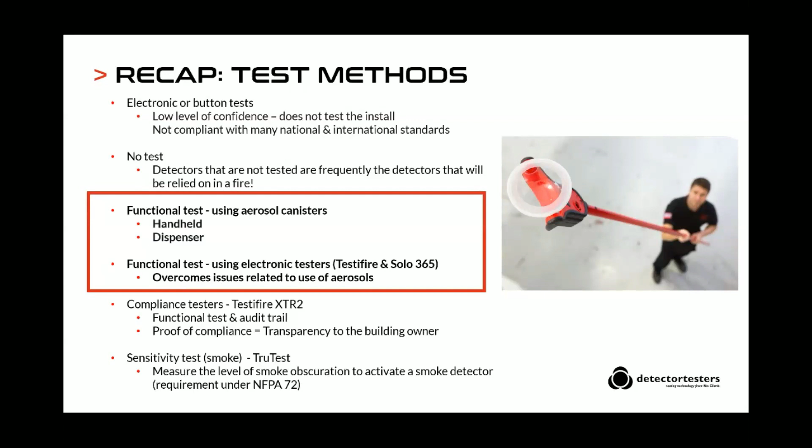So I just wanted to recap on that, just for ease. What I've done here is gone back to British standards, since a lot of national and international standards derive from British standards. I wanted to take a few little clauses here.

First, what actually is a functional test - British Standards clause 45.4 defines it quite nicely. It says tests should enable elements of combustion to travel unhindered from the protected room into the chamber and cause an activation. That's absolutely key. The functional test is currently looked upon around the world as the best way to get the highest level of confidence, whether testing smoke detectors, heat, or carbon monoxide, or any combination - proving the fire phenomenon can travel into the chamber and cause an activation.

It's also in the British standards, in slightly different words - 45.4 note 13. As we were just saying, the use of a test magnet or test button just doesn't satisfy the requirements for commercial fire detectors. British standards make it really clear that this is not compliant at all.

One other thing we'll touch upon briefly - technology is moving on in all sorts of areas, including detection. We're seeing more multi-sensors coming to the market now - fire detectors that usually employ a smoke sensor and a heat sensor, but sometimes also a carbon monoxide sensor, or any combination of those. 45.4J talks about the testing of multi-sensors.

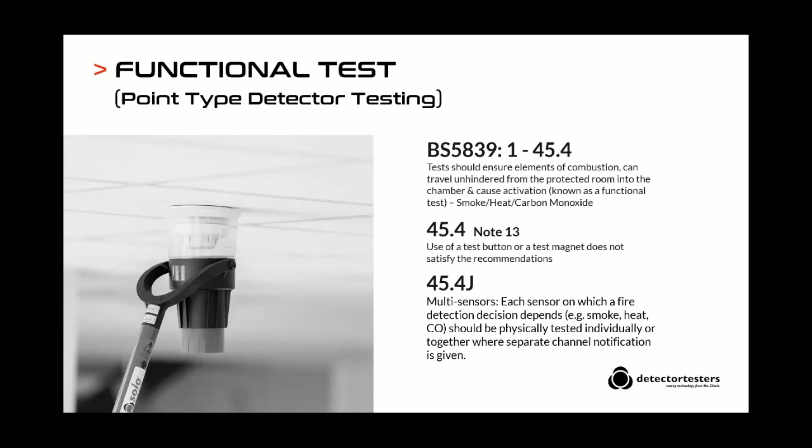But one thing to be aware of when testing multi-sensors - if you test them individually like that, it may be compliant, but it will take a lot longer to test, because the whole point of a multi-sensor is to push back against false alarms. That's why they're becoming popular and being installed. This means a multi-sensor that only sees smoke will take longer to go off, but if it sees smoke and heat, it will go off faster. That has implications when doing your test and maintenance as well.

So let's have a look at functional tests in a bit more detail, and in particular, let's start off by looking at smoke evaporation. So what we're talking about here is the evaporation of test smoke, and it doesn't matter if you're using an electronic tester or an aerosol canister to generate that smoke. There is an optimum temperature range here.

I know a number of you will have to work with this particular range. The optimum range for testing smoke detectors is between 15 and 25 degrees. That's not to say you can't test them outside of that range, but you've got to be aware of what the limitations actually are. The reason for this is that the test smoke is designed to evaporate in that particular range.

What happens is that as the temperature drops and goes below 15 degrees C, you will get slower test smoke evaporation - it takes longer to evaporate. This has implications which can basically end up wasting time, because any lingering smoke around a detector can cause a reactivation of the detector.

And in particular, this is an issue for conventional detectors. Now, again, I think we touched upon this in the last session, where we talked about the difference between conventional and addressable detectors. Many addressable detectors have the ability to automatically reset, so when the engineer carries out a test, the sensor is actually reset. But with a conventional detector, in most situations, you have to go back to the panel.

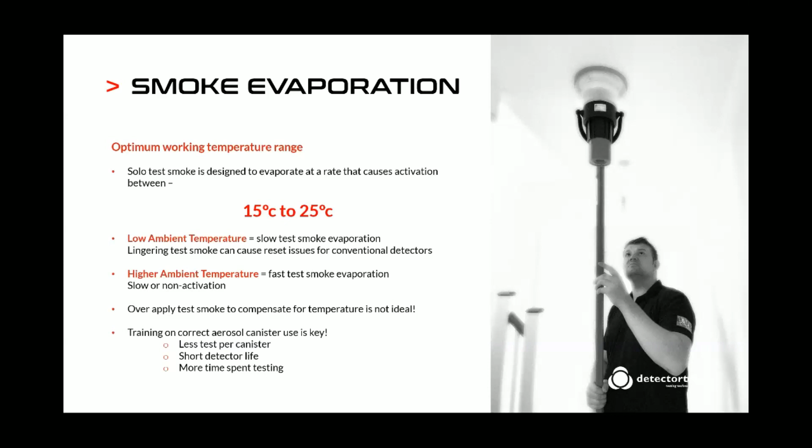It means the chance of misusing it goes up, and there are a number of factors that relate to that. In the worst case scenario, if the engineer using the product isn't using a dispenser, and instead uses one of our aerosols designed for use in the dispenser by hand, that can shorten the detector life and lead to more time being spent at the detector.

We spoke a little bit about a phenomenon called nuisance re-alarms, and we need to dig deeper to make sure we fully understand what a nuisance re-alarm is. This is where the fire detection system has been disabled from connection to the alarm receiving center, and the engineer's on site carrying out tests. One problem that can occur is the reactivation of a smoke detector after a test, due to lingering test smoke. This leads to more time on site and a delay because of the delayed detector reset time.

What we've learned from the market is that this can be a significant issue when testing conventional detectors, particularly with aerosol canisters. It's not a problem with electronic products, and I'll explain why. It's not just about the temperature - there are other factors that could contribute. We've got low ambient temperature, which we said is below 15 degrees. You've also got a big rise in the number of optical detectors now installed - they are the main type of fire detector or smoke sensing chamber used.

One issue optical detectors have had to deal with is they need some form of gauze or mesh around the outside of the chamber to keep insects out, because insects getting into an optical chamber will cause a false alarm. That's all well and good, and most manufacturers over a 20-year period have implemented that. There are still a few out there that don't have that gauze. But the side effect is that if an optical detector has that gauze, it will hold the test smoke in, and that can contribute to the reactivation of a fire detector.

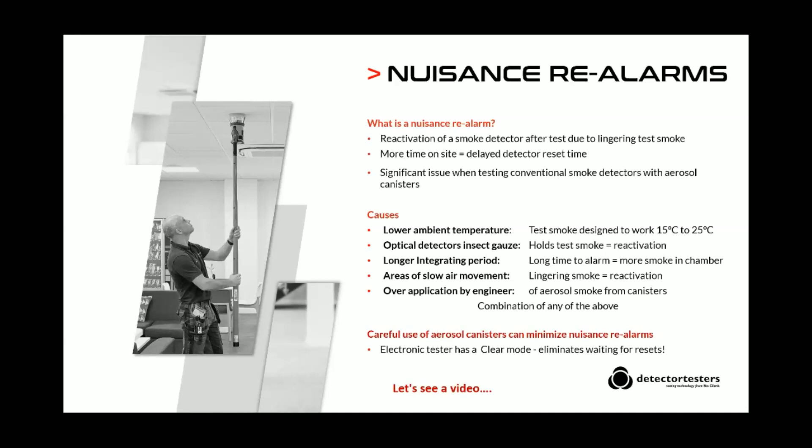That's the best they can do, but if you're looking to completely eliminate the problem, this again is where technology comes to our help - in particular with what we call the clear mode. All of our new electronic testers, the 365, the original Testifire, the XTR2, and even our fixed tester, the Scorpion, all include a clear mode. What does the clear mode do? It removes any lingering smoke from inside the chamber, and this is why you can eliminate it, which can save you a lot of time. So let's have a look at a video - hopefully this is all going to work fine.

Nuisance re-alarms occur when the smoke detector under test reactivates due to lingering or excessive smoke still in the chamber. Sometimes this can mean an extra few minutes per detector, other times it can last half an hour or even more. Nuisance re-alarms are more likely to be caused when testing with a smoke aerosol canister, particularly if used by hand, increasing the test time per detector, which soon adds up over the whole site. We'll explore why this is and what can be done about it later on. Not all fire detection systems are the same.

Some systems also reset after a test, whereas others require the engineer to carry out a reset from the fire panel. In extreme cases, multiple resets may be required before the smoke detector chamber finally clears and the engineer can move on to test the next detector.

Here are 6 factors that impact how quickly the smoke in a detector chamber clears.

Number 1, some smoke detectors have gauzes to prevent insects entering the chamber and causing false activation. The downside of this gauze is the fine mesh can also keep the test smoke in the chamber for longer, causing the detector to reactivate.

Number 2, lower ambient temperatures, that's below 15 degrees C, can mean that the test smoke is slower to evaporate, which means it can linger in and around the detector chamber for longer and can cause reactivation. Optimum aerosol canister temperature range is between 15 and 25 degrees C.

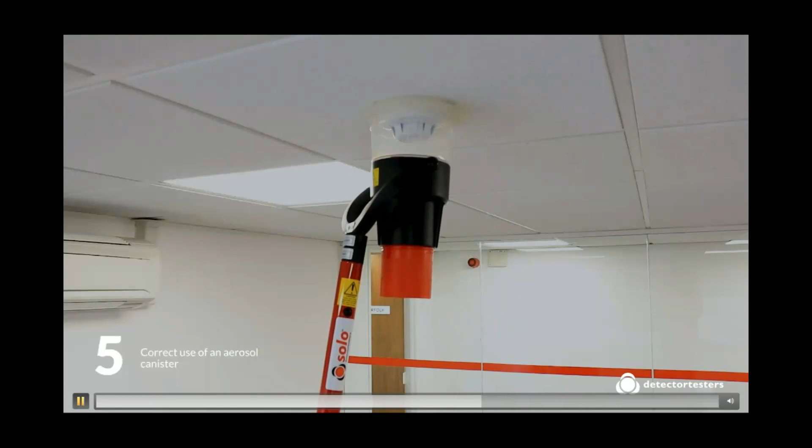Number 5, aerosol smoke canisters from detector testers include canisters specifically designed for either use by hand or within a dispenser. It's important to note that the Solo aerosols are optimized for use in the Solo 330 dispenser. They're not designed for use by hand. Use in this way wastes smoke, contaminates the detector, and can lead to nuisance false alarms.

And finally, number 6, if you require a handheld smoke test solution, then we have Smoke Sabre with its unique design, which prevents use too close to the detector, which eliminates both the risk of contamination and nuisance false alarms.

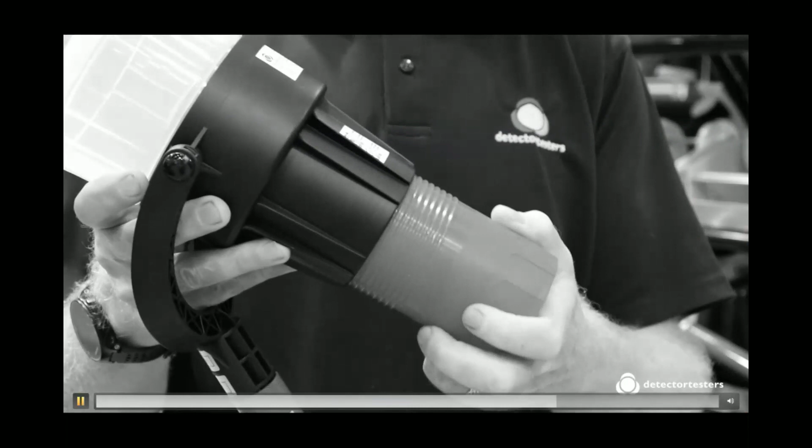So how can we minimize the impact of nuisance false alarms? Reading the instructions on the side of the canister really does help, so make sure you do that. Be aware of detector integrating times. Be patient. The newer designs have much longer times to alarm.

Use less aerosol smoke. Be frugal with it. Also, be aware of the temperature impact. Canister temperature has an impact on the performance.

So now you know how to minimize the effect of nuisance false alarms. But what about if you want to completely eliminate the problem?

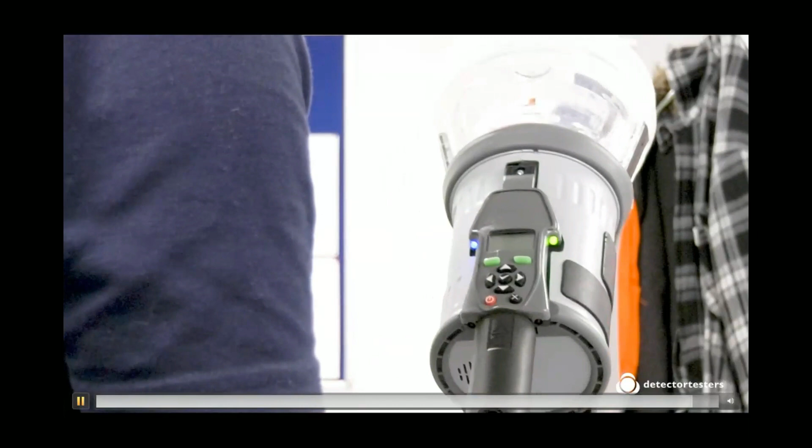This is where you need to look to the capsule or cartridge-based solutions that control the smoke release and include a clear air feature that removes any lingering smoke from the detector chamber and eliminates that wasted time caused by nuisance false alarms.

Okay, that's really helpful, and hopefully that's reinforced what we've actually just been covering. And I know you guys do like stories as well, and I've got a nice little story for you here.

I caught up with one of our customers, a long-term customer, a while back, and originally he was a Testifire user using the product you see on the screen there, and he had changed jobs. He'd gone to another company, and he'd unfortunately given up his Testifire and gone back to using a Solo 330.

And I just caught him just as he finished a job, and he'd been testing the fire detection system in a crematorium. And he was explaining a story to me, and he said, 'You'll like this one.' He said, 'I know the answer.' He said, 'I just want to tell you this story.' He said, 'I got given this job to test the fire detection system at the crematorium.'

And he said, 'I got strict instructions to get in there early and to make sure I'm out before 9 o'clock, because at 9 o'clock the first hearse will be coming down the drive, and everybody will actually be coming in there.' He said, 'The last detector I tested was in the dome, in the crematorium. It was high up. It was a conventional detector. Because it was early in the morning, the temperature was actually lower.' He said, 'That detector took an hour to reset.'

He took an hour on it. And he said, 'Of course, I know the answer.' He said, 'If I had my Testifire,' he said, 'I would have been gone and done in 2 minutes. But I had to waste an hour because of the fact I didn't have a way of testing it.' And it was that low temperature.

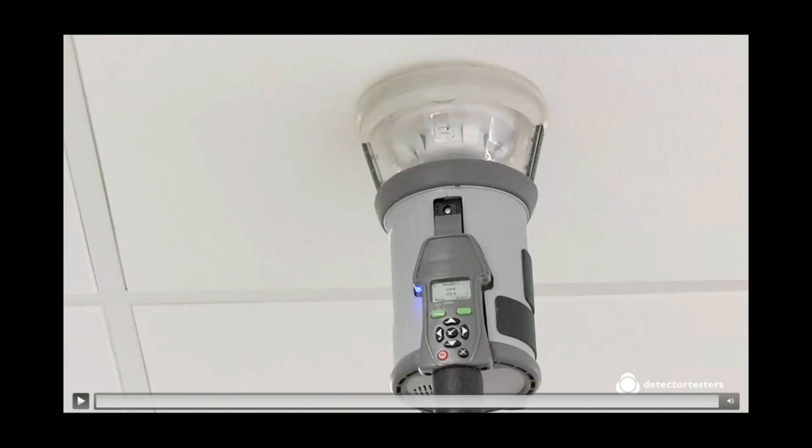It was a detector which had a gauze around it, and a dome is also another issue here because you've got a limited amount of air movement. So again, it just emphasizes how technology has come along to improve things.

So let's go and have a look a bit more about correct and compliant use of aerosols. Let's first of all understand how aerosols work.

The aerosol canisters are pressurized containers, and inside that container they contain two things: the product, which is the formula we've made to test the detectors, sitting as a fluid in the bottom of the canister, and a propellant gas that sits on top of it. When you press the nozzle on top, the gas forces the product out through a tiny hole, and that's actually how the mist, the aerosol, is made into a fire-like phenomenon to test detectors.

The size of the nozzle and the pressure are all adjusted to make sure the particle sizes are between 0.01 micron and 10 microns, because as you can see on the chart, particles from a fire can vary in size quite dramatically. One of the key challenges with all our test products is making sure the particle size covers that range of actual fire products.

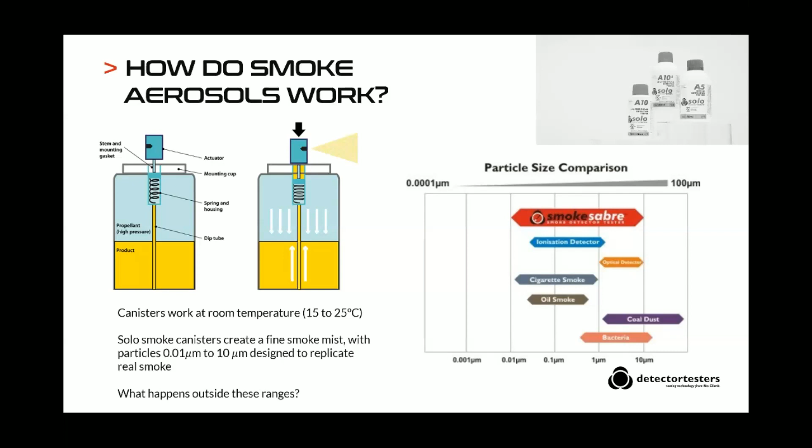So what we need to understand is what happens to an aerosol canister outside of these ranges. When working outside that range, you've got two temperatures to be aware of: one is the ambient temperature, which we've spoken about already, and the other is the canister temperature.

As the temperature increases, because the aerosol canisters are pressurized containers, the increase in temperature leads to an increase in pressure. That increase in pressure then leads to fewer tests per canister and quicker smoke evaporation. It also means the particle sizes change slightly, so they're not at the optimum size, and this can then lead to issues with activating the actual detector.

That's with higher temperature. At the lower temperature, pressure is reduced in the canister, and the smoke takes longer to evaporate. Again, the particles emitted are not the optimum size, and in the worst case scenario, this can lead to the detector not actually activating.

One of the things you've got control over is the aerosol canister's temperature. You don't tend to have much control over the ambient temperature—maybe you can put the air conditioning on, or warm up or cool down the place accordingly—but in most cases you don't have that ability or luxury. When it comes to the canister though, you've got control of it. It's the tool that you're actually using.

It's worth knowing that you can compensate for these extremes in temperature by either warming or cooling the canister. For example, here in the UK at the moment we've got cool nights, well below 10 degrees, and what do most engineers do? They leave their canisters with their test equipment in their cars and vans overnight, so when they turn up at a job in the morning, those cans are cold.

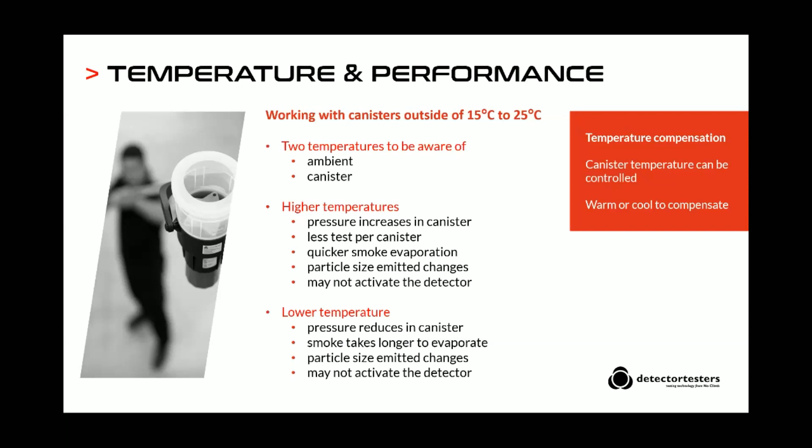So to get the optimum out of them, the best thing to do is move them to the footwell in the front of the vehicle, so as they're driving to the job, the warmth from the car heater warms them up nice and gently. Or they could put them in their pocket to warm them through. The inverse is true when things get warmer—you might have to run a canister underneath a cooler tap just to cool it down a little, not too much. That's the compensation we can actually do.

But what happens is as that temperature drops down, that's when you start to have a few little problems that occur. You can get to the stage when you get well below 10 degrees where it could be the case if you've got a long integrating period, you might not actually set the detector off. The reverse is also true. As the temperature gets higher, you'll get the ability to set the detector off if it's a faster activating detector. But if it's a slower activating detector like a multi-sensor and you're just testing the smoke chamber, you may get to the situation where you can't actually activate it.

We should also point out that because aerosols are pressurized goods, they're classified as dangerous goods. One reason for this is that, as it says on the side of any aerosol canister, do not expose them to greater than 50 degrees C because they will expand and can explode and rupture. It's quite shocking the amount of power a single aerosol canister can actually have. So it's absolutely key, not just with our aerosols but all aerosols, that you make sure they are not exposed to greater than 50 degrees C.

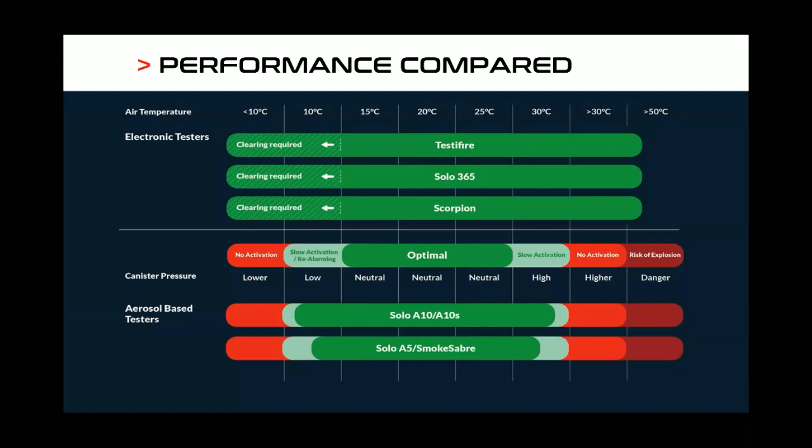So we started talking about the aerosol ranges. Let's talk a little more about this and why we've got two types of aerosols for use within our dispensers. We've got Solo A10, which is a special non-flammable aerosol canister, and we have Solo A5, and also the handheld SmokeSabre - those products use a flammable propellant.

Going back in time, back to 2018, a lot of countries around the world were getting quite concerned about the environmental implications of aerosol canisters. A number of the propellants used at that time were known to be causing problems with the ozone layer and contributing towards global warming. So in 2018, Detector Testers, as a responsible manufacturer, we were told we had to change the propellants we used. This saw the demise of the old A3, A4, and a number of other products, and we had to come up with non-flammable aerosols.

Now, non-flammable aerosols are pretty special and a little bit rare. We've had to have a very special propellant made up for our Solo A10. That means that although it's non-flammable, because it's specialized it's limited in use, it is a more expensive product. But it does also have an improved level of performance - as we saw on that graph, it will work across a wider temperature range.

Now, in situations where flammability isn't a problem, you can use the aerosols that use hydrocarbons, a mixture of butane and propane. This is what you'll find in any high street aerosol canister you purchase from the shops. So this is a very common propellant used within aerosols, but it does have that one drawback - that it is a flammable propellant. Now, there are many situations where you can test in offices and various different buildings, and there isn't any risk involved in using flammable propellants.

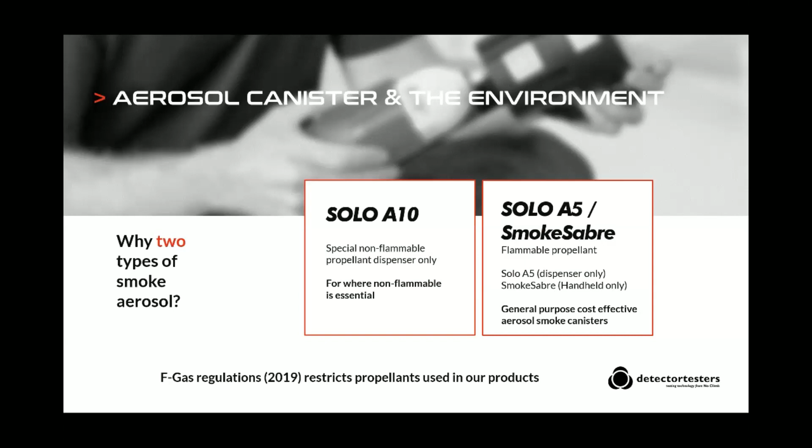Aerosol canister safety: at high temperatures there is a risk of explosion. These are classified as dangerous goods, so you need to be very careful where you store them and how you transport them. For example, aerosol canisters cannot be transported through the normal postal service, you have to use special couriers to transport them around. There are always going to be issues related to aerosol canisters, not necessarily our canisters, all aerosol canisters, because all aerosol canisters are classified as dangerous goods.

It's really important to make sure you read those instructions. The couple of things you need to watch out for: high temperature, do not expose to greater than 50 degrees because there's a risk of explosion. The other aspect is to do with flammable aerosols, because if an aerosol canister is punctured in some way, the flammable gas will be released. If it's in open air, that's not a problem, but if it's in a confined space and there's a source of ignition, that's going to cause a flashover explosion. Sure enough, there have been cases around the world where this has actually happened.

I did read about one story here in the UK, and it wasn't with our products, it was an air freshener. A lady pulled up in a car park, turned the ignition off on her car, and pushed the seat back to relax. As she pushed the seat back, she crushed an aerosol canister, releasing the flammable propellant, and it just so happens at the same time she lit a cigarette. So there was a massive explosion, and that's just from a single aerosol.

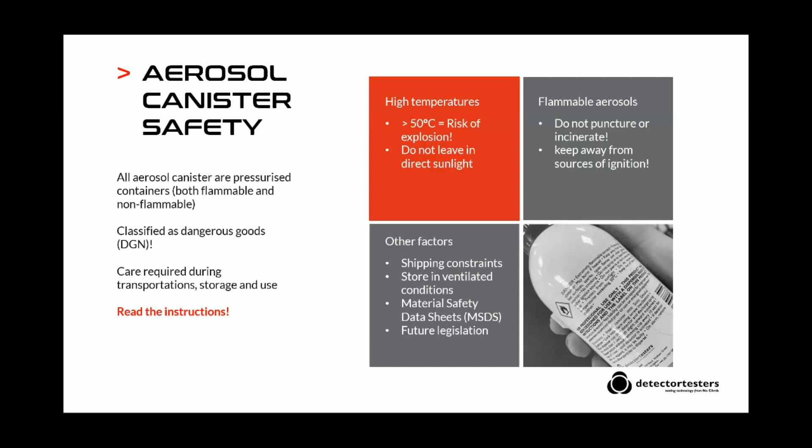The future is going to be more legislation around aerosols. As I said earlier, there is no expectation for aerosols at any time in the future to be discontinued by detector testers or by worldwide legislation, but the expectation is it's going to continue to tighten.

That's the question that many people ask: will they be discontinued? I've made that quite clear. Currently, no regulation plans or plans by Detector Testers to discontinue aerosols. And if we're completely honest here, these are the main tools that are actually used in the world.

However, regulations will continue to tighten, particularly around health and safety and the environment. There's now looking at the VOCs that are emitted from actual aerosols. You've got the unique formula identifier, which is basically to identify if aerosols have any kind of toxic product. That's a new standard that's actually come in. We've also got the situation detectors are coming smarter, which can mean longer test times, which means more important training for those who are actually using aerosol canisters. It can also mean that in certain instances, there are some detectors out there where you cannot test them with aerosols at all.

Okay, I think I've got another little video for you. Stop me talking. 31st of December 2017, the new F-gas 2 regulation had an impact on our range of aerosol canisters.

For those that wish to continue to use non-flammable aerosols, the old A3 has now been replaced by A10, available in two sizes. A10S is 250 and there's an A10 in a 150 canister size. Both are non-flammable and a direct replacement for the old Solo A3. In situations where use of a flammable aerosol isn't an issue, there is Solo A5 as an alternative, which is a more cost-effective solution, giving a lower cost per test.

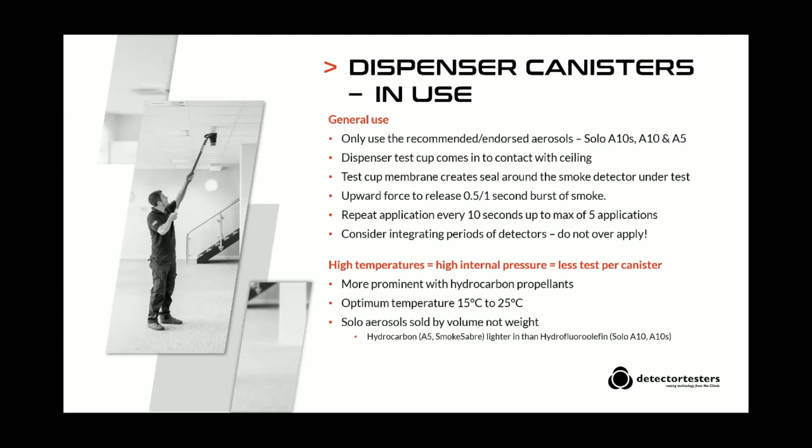Okay, let's have a look at Solo testers. The dispenser we've been talking about is the Solo 330, but it's also worth mentioning there is a bigger test cup version, the 332.

The 332 was originally designed to test the American UL detectors, some of which are a bit bigger. So if you've got these UL detectors installed, you're going to be better off using a 332 than a 330. But in most places around the world, the Solo 330 is the dispenser that everybody goes to. The test cups are not interchangeable, so you use one or the other.

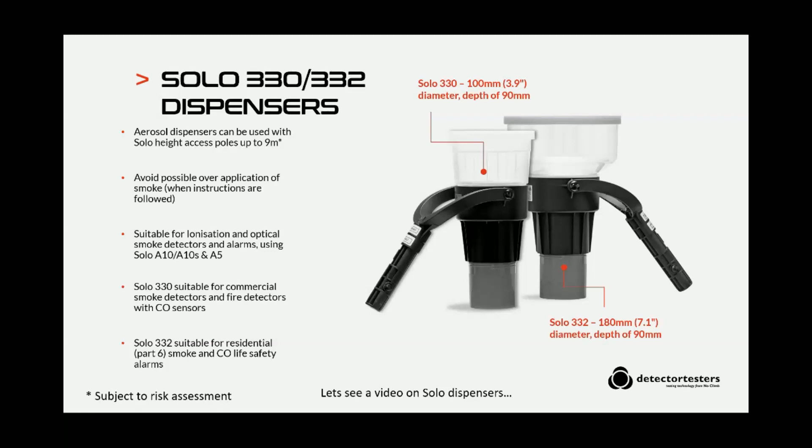You choose the one that's appropriate. As we said before, these dispensers can be used with our Solo height access poles that give you access up to 9 meters. The whole point of a dispenser is to try to restrict the potential possibilities of misuse, but in the wrong hands, someone who's not been trained could still misuse it if they tried hard enough.

But if you understand detector integrating periods, you know you've got to be patient. You just need to apply the smoke and then wait. So the 330 and 332 are for commercial detectors. We do see an element in certain parts of the world of residential alarms, which are bigger integrated devices - they tend to be tested by the bigger test cup, the 332.

Okay, let's have a look at a video. The Solo 330 and 332 are used with the compatible Solo smoke and carbon monoxide aerosols that are used to carry out functional testing of commercial fire detectors and residential fire and life safety alarms.

So which one are you going to use, a Solo 330 or a Solo 332? The Solo 330 over the years has become the industry standard for testing commercial fire detectors. The test cup has a diameter of up to 100 millimeters, which means it will accommodate commercial fire detectors available on the market. The Solo 332, as you can see, has a larger test cup of 180 millimeters across, which is ideal for accommodating residential fire and life safety alarms.

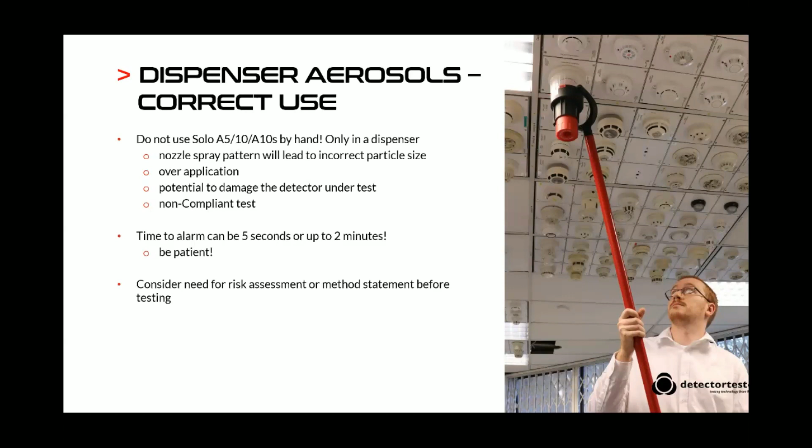Consider the need for a risk assessment and a method statement before testing. If you're working in a public area, for example, and you've got a tester which you're waving above other people's heads, think about what could actually go wrong if you lost control of it.

We're going to have a quick look at heat detectors. The key bit here is that there are 2 standards out there that cover heat detectors. You've got the European standards, which is what we follow here in the UK, and you in India also have a degree of these EN54-5 detectors.

But you also have the NFPA or UL heat detectors, and they just have different methods of classification. The key bit to be aware of is that there's a whole array of different heat detectors out there, but we're talking mainly about the point type detectors that you will find installed in a typical commercial building.

These have different thresholds at which they actually go off. Typically, in most situations, a standard office is going to be 57 degrees. If it's somewhere with a bit more ambient heat, then it might be 80 degrees. And if you're working in commercial kitchens or industrial areas where there's a high degree of heat, that's when you go to the higher activation detectors - ones that have an activation point above 90 degrees.

It's again important to be aware of what heat detectors you're actually testing and what environment you're working in, because some of our testers will not test those higher activation detectors. So let's have a look at the Solo range.

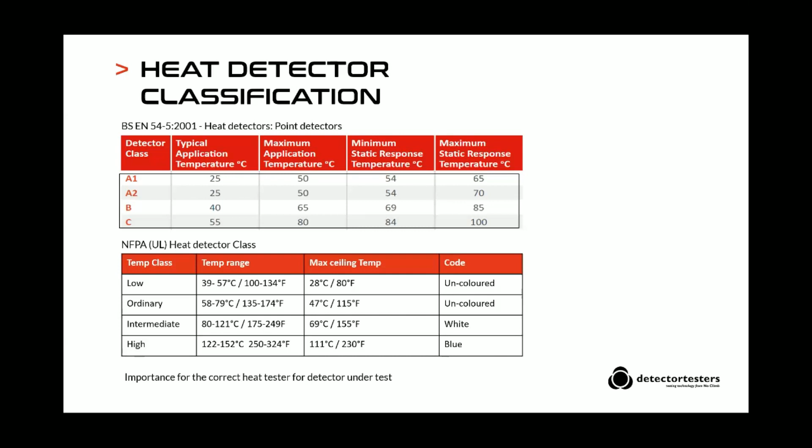We've got 2 heat testers in the Solo range. We've got the battery-powered Solo 460, which is a very popular tester, and particularly because it's battery powered, it hasn't got any mains trailing lead. But the one thing you need to be aware of is that tester only goes up to 90 degrees, so it won't test those high heat detectors out there. It doesn't have enough heat output.

Whereas the mains powered 423 and 424, it's just different voltage levels that you actually have there according to where you're actually working. That will go up to 100 degrees, so that will test those higher activating detectors. But the downside of it is that it does have that trailing lead.

Another factor between these two testers you should be aware of: with the mains tester, you've got an almost unlimited amount of power there. So the heat wave that comes up from underneath is extremely wide, and it basically makes testing heat detectors really simple, really quick, and really effective.

When it comes to the battery tester, you've got a pencil thin beam of hot air that actually goes across the test cup, and the idea is to go through the detector chamber and then hit upon the thermistor within the actual chamber. The reason for this is because we've only got a battery there, a 7-volt battery that is actually connected to the tester.

One of the things, again, this is where knowledge and experience comes about, is that heat detector design is changing. Not only have you got different profile sizes, you've got different positions of the thermistor. Historically, legacy, they were all centrally mounted, but increasingly now they're offset thermistors or dual offset thermistors. When you're using the battery powered tester, it does mean that in some instances you have to think about how you're testing that particular detector.

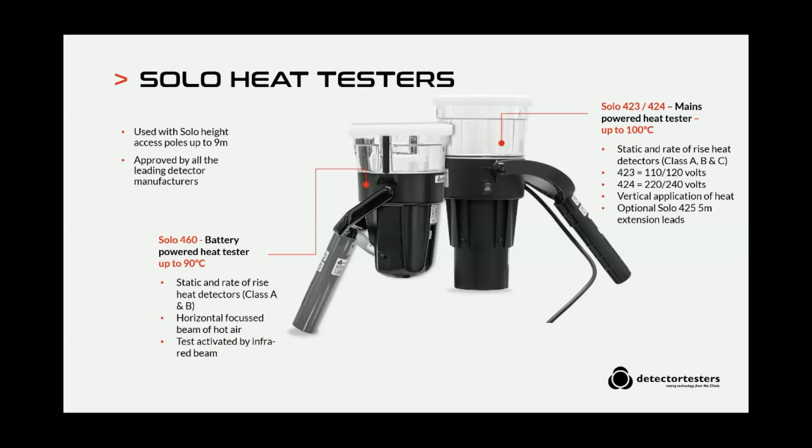One of the key things many people have done is rotating the tester around the detector under test, because that disperses that pencil thin beam of hot air across a wider area, and it can mean you get much quicker test times. So the need for new technology.

We've mentioned aerosols. We're talking about the technology which is the most common, and it's actually out there in many countries around the world. For many years now, detector testers have been aware that ultimately things do have to move on. And that's what we've been working on for a number of years: alternatives to aerosol canisters.

And what we found is capsules and cartridges. That's what we've been working towards. Why have we got capsules and cartridges? Because they are not classified as dangerous goods, they are not pressurized items. They mimic, if you like, inkjet printer cartridges. They work in a very similar way to that.

So there's no flammable products. They're much easier to use, much safer to ship around. Also the electronic products that go with it can be more controlled in the release of the smoke, so there isn't any possibility of misuse. So where we are lacking skills and detectors are getting more sophisticated, it's not an issue for the electronic products, it's an issue for the canisters.

This is why it's really important for anybody using aerosol canisters to make sure they're properly trained, because with the electronic products you're going to get far more consistent results, since it's not temperature or engineer skill dependent. We've also got the situation where detector design is changing - technology is making detectors less prone to false alarms, and in some cases harder to test with aerosol canisters.

Again, this is something we've overcome with the new electronic testers. It's a much cleaner test that it carries out, so it's a far better user experience. Any of you that have used our dispensers for a period of time will know that the dispenser can accumulate lots of dirt and muck in there and will regularly need wiping out. With the electronic testers, it's a better user experience, and it also leads to the detectors lasting longer.

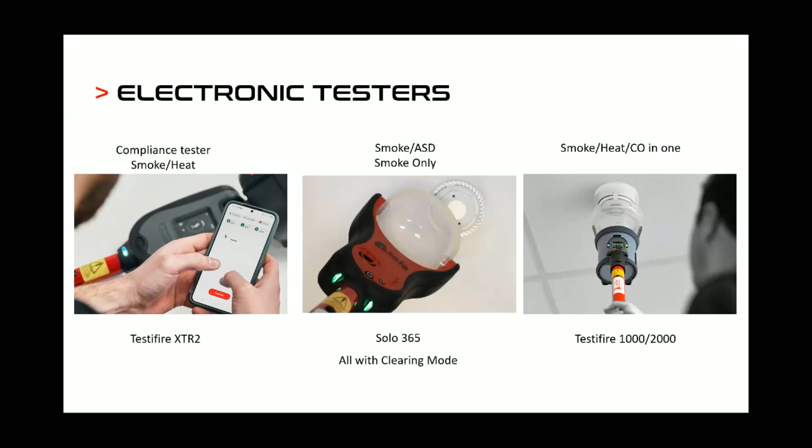If you want an all-in-one tester, you've got the original Testifire 1000 and 2000 range, which has proven to be very popular, especially as multi-sensors have become more popular. And now—not yet released in India, but starting to come out around the world—there's the Testifire XTR2. It has the same functionality as the original Testifire, but it's capturing what has actually been tested. It's got that proof of compliance built into it.